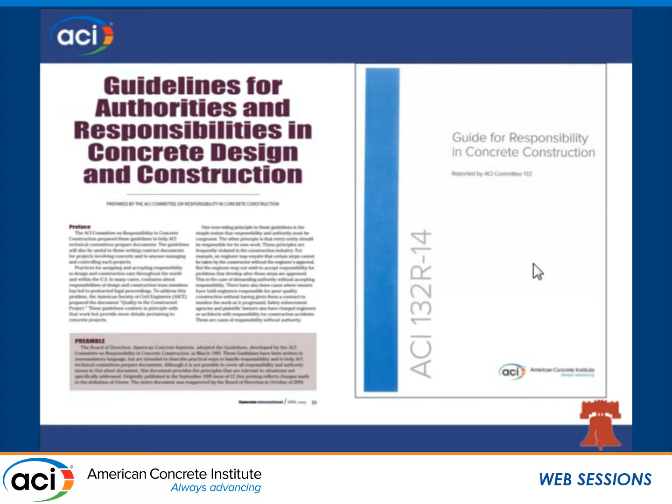They were not a board committee for long, or I guess it wasn't a long-lived situation as a board committee. They then became a technical committee because they had an important message to get out there. So they ultimately did publish a formal guide document on the responsibilities in concrete construction. A very important document, but it addresses the responsibilities in new concrete construction, which are significantly different. So one of the things the committee is looking at doing now is to either create an additional guide or an appendix to really address the differences in the repair rehabilitation industry.

A little bit more background, I'm going to reference a very important document through good portions of the presentation this morning: ACI 562, the code requirements for assessment, repair, and rehabilitation of existing concrete structures. This is a new repair code that's in the process of being adopted officially throughout the country.

Hopefully everybody in the room is familiar with this, but the intent of this code is, you're all familiar with 318: once a building is built and has a certificate of occupancy, the expectation is 318 is no longer applicable to that building. 562 comes into play, so any alterations, repairs, or renovations that happen to that building really get governed by 562 in the future. And as with 318, 301 is the specification that goes along with it.

There's a document that hopefully will be published within the next year: 563, which is the specification, the instructions to the contractor for repair.

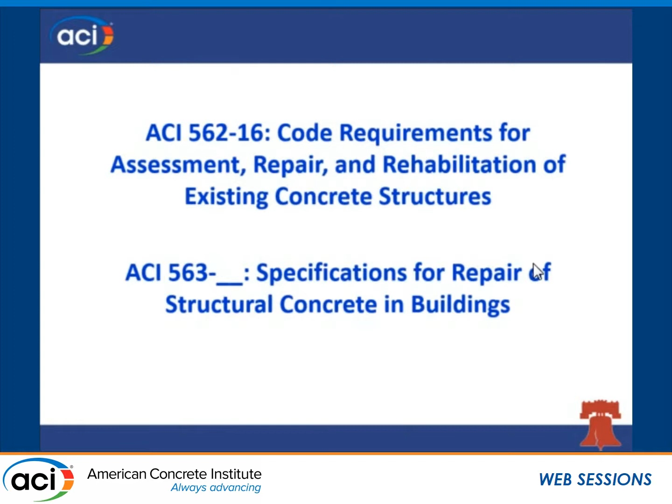So we'll talk about the first facet of any repair project. They always begin with an evaluation, and evaluations are done for a number of reasons. Whether an owner wants to change the use of the building, there's deterioration or distress in the building structure, there's damage that happens whether it's by fire or a natural event like a hurricane or storm, or even just a transaction — an owner selling the building and a new owner taking it on.

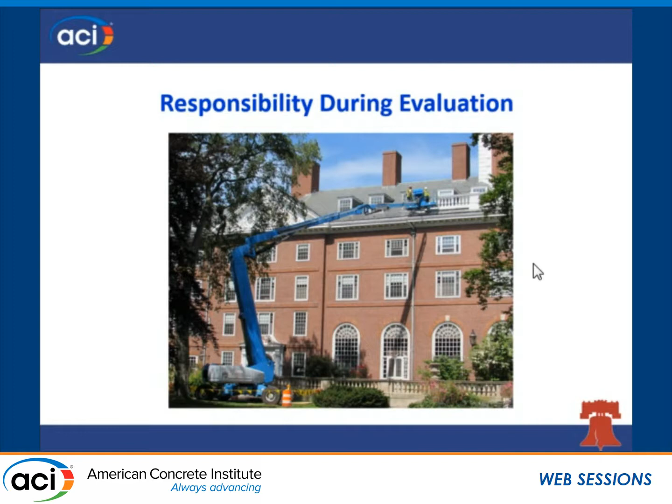So there's a lot of reasons to perform evaluations. Just so you know, I know Keith's not here, but I tend to use the terms evaluation and assessment interchangeably. I know they're not the same — they changed the title of the code from evaluation to assessment — but I'll use them interchangeably, so pardon my taking that liberty.

There are a number of guidelines out there that help understand and are very useful when performing evaluations of buildings. ACI 364 has a guide document, Evaluation of Concrete Structures Before Rehabilitation. ASCE has 2 relevant documents, and these are just a couple that are listed. The ASTM one talks about doing due diligence level assessments. The Japan Concrete Institute has a recently published document that's very extensive — it's a very good document. And then the last one on the list there is the one everybody's familiar with now: facade inspection ordinances.

And there are other documents out there. The thing about these documents is they're very good at talking about the process for performing evaluations.

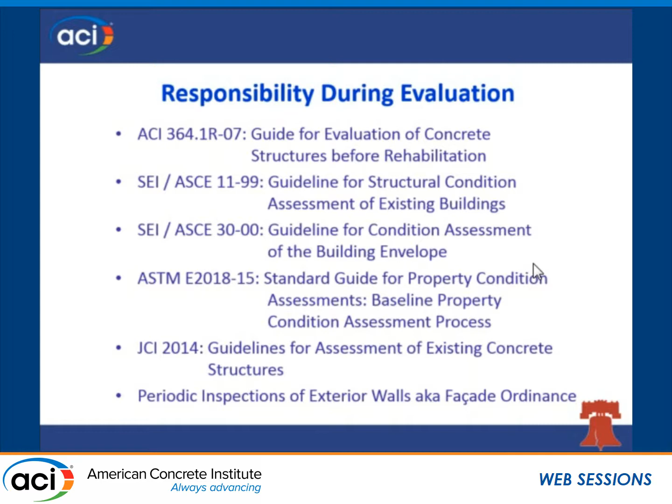They talk about different levels of evaluation, whether they're detailed or preliminary, and in some cases due diligence, giving a lot of instruction in that regard. But when it comes down to the standard of care and the responsibility of a design professional performing that work, there's a lot to be desired, certainly room for improvement. Let me give you some examples of how they do address that. The Japan Concrete Institute defines what they call a responsible engineer, really talking about the qualifications of the person performing that evaluation.

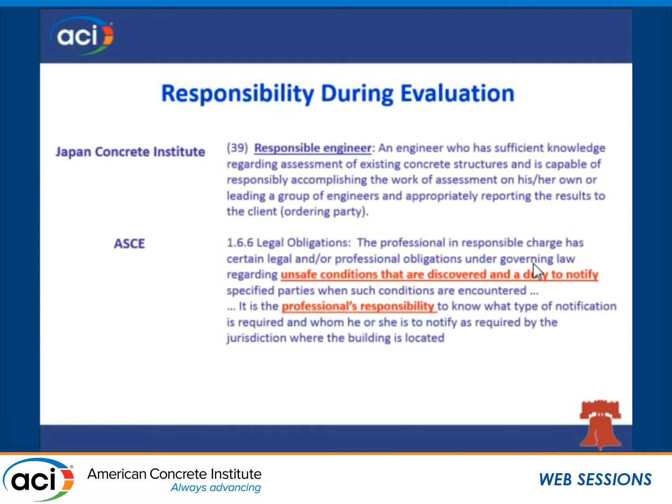Where these guides get far more specific about responsibilities is typically when you're dealing with unsafe conditions. This is an excerpt from one of the ASCE guides, and I've highlighted that area in red. Whenever unsafe conditions are discovered, you have a professional responsibility to do something about it, typically to notify the proper party and then see that it's remediated or to protect the public.

Facade ordinances have been around in some jurisdictions for quite some time, but in Philadelphia they only adopted theirs probably about 6 or 8 years ago. This is an excerpt from their ordinance, and again I've highlighted some of these areas. They talk about an appropriate professional standard of care to detect distress conditions.

When you undertake a facade ordinance inspection, you're specifically looking for conditions that could be a hazard, and if you discover it, you've got an obligation to report that. In Philadelphia, there's an obligation within 12 hours of encountering that condition. These guidelines are beginning to get far more definitive on responsibility. Going back to what 132 is trying to do is fill in the gaps and provide more information—that's what we're hoping comes out of presentations like this and the special publication.

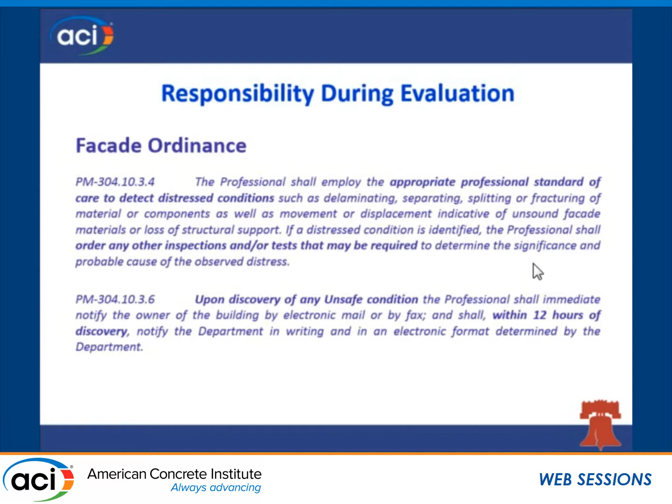Now let's give you some specific examples of responsibility during the evaluation period—some things that were considered that seem to make a lot of sense, and some things that perhaps weren't considered too well. This is an overview on the left-hand side of an aging parking structure in the northeastern United States, serving a healthcare facility. I think this is 30, 40 years old—it was an unbonded post-tension system, still is, it's still there.

The photo on the right, I apologize, is a copy of a photograph so it didn't come out too well. But what was very apparent—back up a little more—they had a condition assessment done by an engineer that told them they had problems, that the post-tensioning system was failing. That evaluation was several months old. When I was asked to look at it, they were getting proposals from several engineering firms.

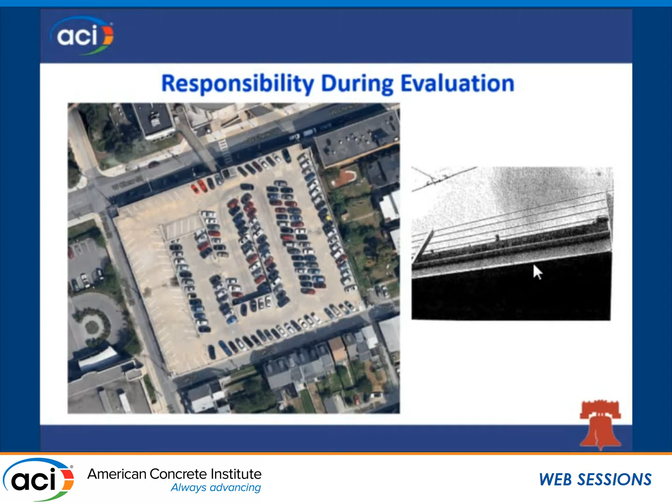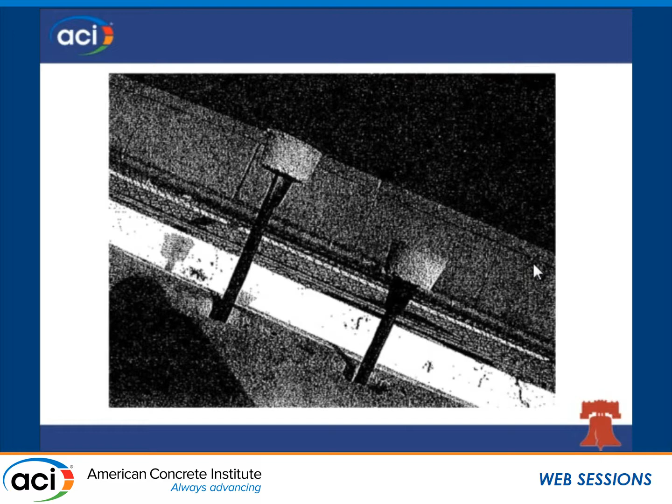They had given recommendations to not park in certain areas of the deck—good thing. I was kind of surprised it had been several months since this report and they hadn't done more. But probably the thing that was more disconcerting to me was there were probably 24 tendon anchors sticking out of the perimeter of the garage as you walked around it. So it wasn't just a couple of tendons—obviously there's a concern.

You want to tell the owner of the parking structure that there's probably an impact on the load carrying capacity of the garage with this amount of tendon anchors. The thing that's not really apparent though is that right across the street is residential homes—this building was surrounded on 3 sides by row homes like that. I don't know if you've ever seen anchors, whether cut accidentally or broken accidentally, but there's a lot of energy released when an anchor goes.

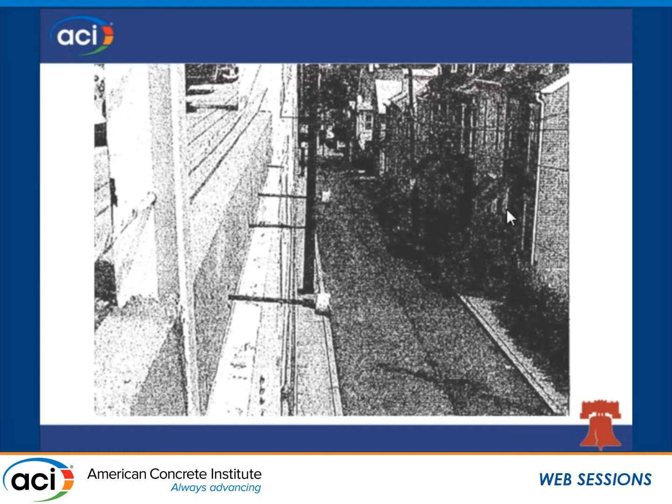You see some of these are still intact right here—they don't all have grout pockets on them. It's not uncommon when anchors break that the grout pocket is shot across the street. So again, we talk a little bit about standard of care and how you really have to have a far better sense. When looking at distressed structures, you really should have a pretty good understanding of what type of structure you're dealing with and consider these things.

If you were here in the morning session, you saw a different vantage point on this photo. You just see things in structures sometimes - I've seen enough of them, I laugh a little bit. That shim stack was in there when they built this garage, which was 15 years old at least when we walked through it.

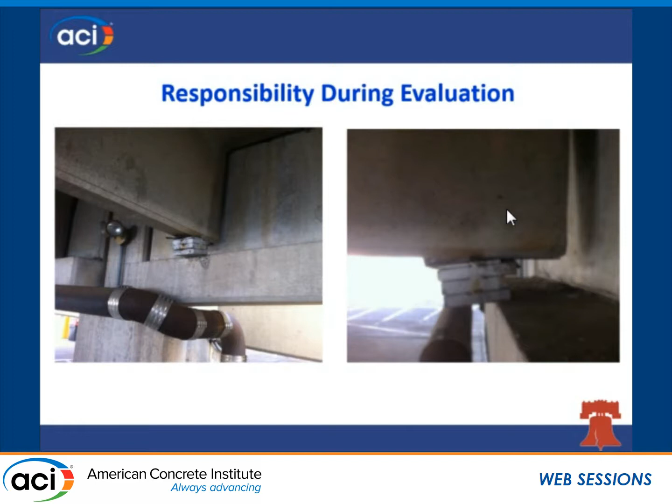If you know anything about precast pre-stressed structures and T's, they tend to move up and down, and the bearings move over time - there's a certain amount of movement that happens. So in the right-hand shot, looking at that closely, that shim stack's about ready to fall out. If you were here in the morning, you saw a picture Keith Kesner had where we actually jacked that back up slightly, pushed the shim stack back in, and stabilized it so it wouldn't come out again. But facade ordinance inspections - I mentioned this for a couple of points I want to make in this case.

When an engineer undertakes an ordinance inspection of a building, they really should be prepared to not only discover unsafe conditions, but to potentially be in a position to do something about them. We were asked to look at this building - it was very apparent this is a limestone clad building, but concrete precast clad buildings could have the same types of problems where you see that halo on the right-hand side. They're obviously distress from the anchors that were causing these fragments to pop off.

This is a relatively new building. When an engineer gets into a situation like this, our policy is not to just tell them they have a problem and go to the local authority and report the unsafe condition. Typically what we'll do, before we even get into a project like this, say when we're proposing on it, is include some level of access to get up close and look at it, to investigate it sufficiently - whether that's renting a high reach or putting a swing stage on a building.

We're usually engaging a contractor. In a situation like this, we actually have a contractor on board with us that helps us facilitate and do the inspection. And then we tell the owner at that point in time, here's some idea on how you can remediate this condition, and we're ready to remediate it as step 2.

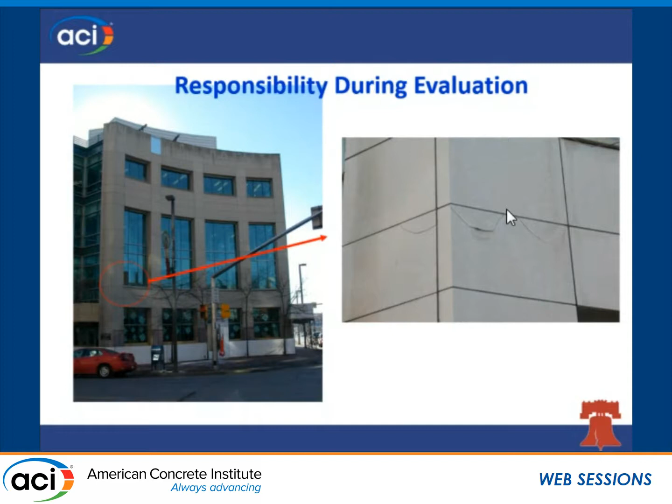I put this up here, due diligence assessments. We don't do a lot of due diligence assessments, but there can be some real significant concerns when you're in that situation. Number one, if you discover an unsafe condition while you're doing a due diligence assessment. By due diligence, I mean, say during a transaction, you're working for a potential buyer of a building.

You see a condition in the building that really is unsafe. You're not working for the owner. Who do you report that condition to? What authority do you have to report that condition to a local authority? What you report on that probably will have an impact on that transaction. So I don't know if you do due diligence assessments, but if you do, you just have to consider a lot of the things that you may run across.

Right, so now we'll transition a little bit and talk about going from evaluation into repair design. This is a clause out of the 562 code that I think is relevant for what I'm going to show you next. And again, the emphasis is added here.

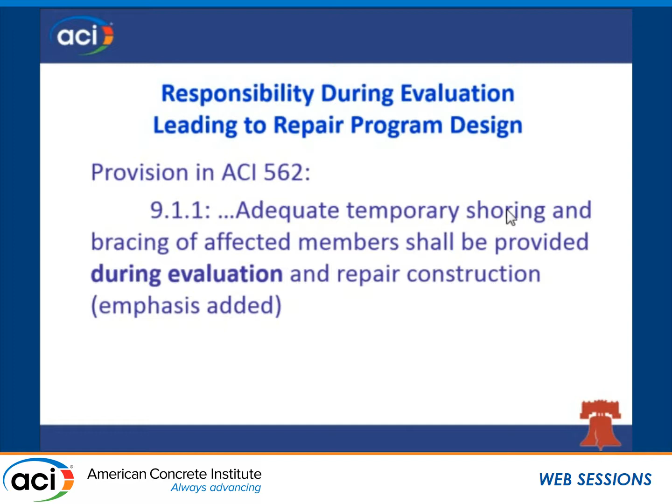So the adequate temporary shoring and bracing of affected members shall be provided during evaluation and repair construction. It's not uncommon that you see conditions during an evaluation that probably shouldn't be left in that state while you put the repair design together and go out there and repair. Sometimes you have to just jump on it pretty quickly. So let me show you an example of a parking structure that we were asked to look at.

It's 3 stories below grade underneath of a research science building. I'm not sure if this is real clear, but as we're walking into the garage and looking up, for the structural engineers in the audience, you'll see some shear cracking. That's not flexural cracking, these are joists. There's no shear reinforcing in these joists. It's more than a few of them that were cracked like that. Became very concerning and something that we brought to their attention right away.

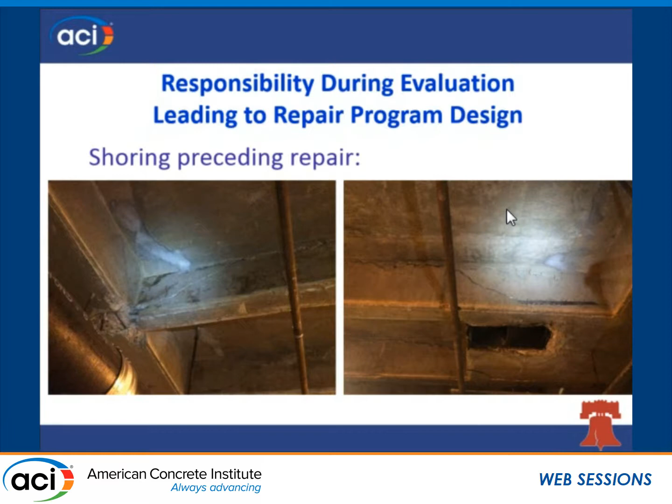But then as we look further, what you were looking up at was actually the loading dock, it wasn't even the garage. Here's the doorway and the ramp into the garage. So to get in the garage, you went in and out here. Those joists you were looking at were underneath there.

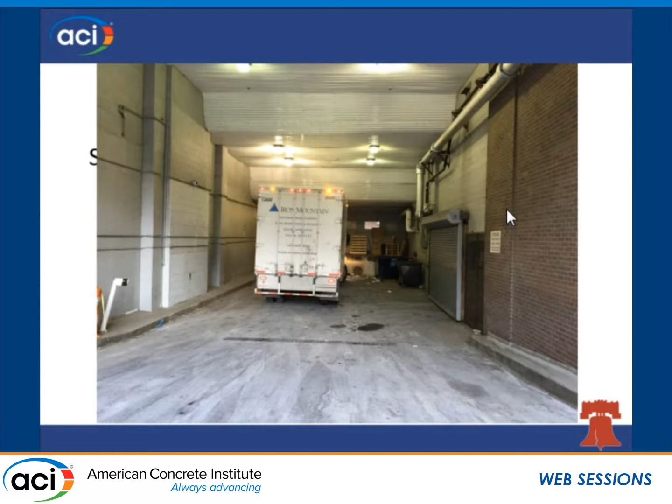So needless to say, we didn't think that was something that could sit that way for too long. So we spoke to the owner about it. They basically stopped using the loading dock actively to bring trucks in. And within a couple of weeks, we had put together basically a shoring program to go in and shore the affected areas, but yet keep the rest of the garage operational down below.

Again, designing new buildings, not a lot of situations where the engineer of record gets involved in shoring. If they do, they delegate it. This needed to happen rather quickly, so we're not too timid about those sorts of things. So we designed a shoring system. We were very specific about what we wanted and how we wanted it installed. And so we prepared documents for it, got proposals, and went out and put it in.

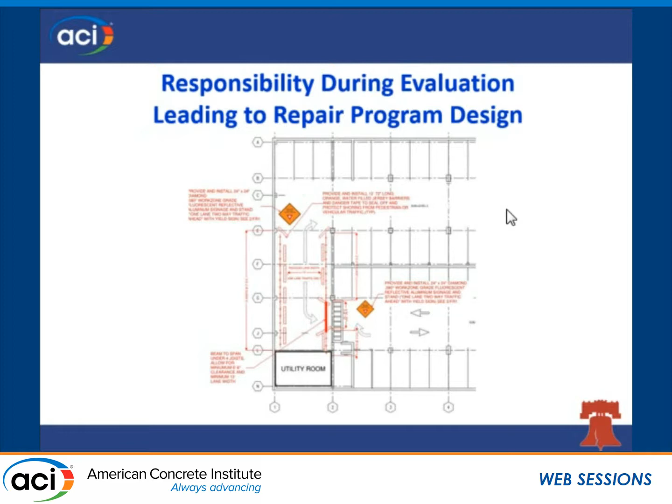So we shored the joists. This is the lower level ramp that you could get under so the garage could stay operational. And really within just a couple of weeks, they had the situation back, at least it was safe. It was quite some time afterward that they went and funded the garage repair they were going to do on the building, but at least it was safe.

All right, now into the repair design itself. The design of concrete repairs, there's a lot that goes into that. You've all attended sessions, presumably, on corrosion and assessing a building and understanding the cause of deterioration and distress in it. So there's a lot that goes into that part of it.

But there's an awful lot that goes into the design of how are you going to accomplish the work. How are you going to access the areas of the building? It's the false work, the scaffolding. Are you going to constrain the contractor or provide limitations for that? This is a stadium that many of you may be familiar with, doing a quite large concrete restoration program on it. And the first phase of it was scheduled to last an entire year.

And the idea, or the two things we looked at is, do we scaffold off the lower grandstand up to the underside of that? If we had scaffolded off these grandstands up, what happened was it would just preclude the use of the grandstands for that entire period of time. This is the Ivy League, they don't fill this stadium for football, but they do fill it for graduation and for certain other programs throughout the year, so that was important.

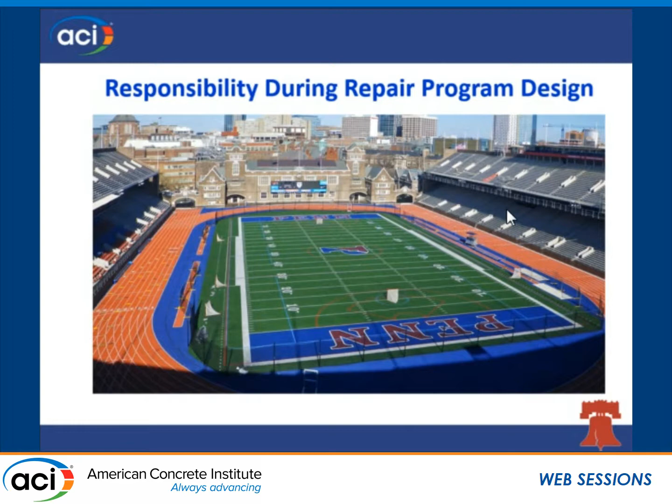So the challenge for us was to look at how do we scaffold it so that they can accomplish the work, but still have the stadium mostly accessible during the year. So we had looked at different scaffolding alternatives for that.

Again, I mentioned means, methods, and sequences of construction. The design professionals in the room are very familiar with that term. Every agency agreement for design professional services, AIA, EJCDC, specifically states that the design professional is not responsible for means and methods and sequence of construction. And we know why - it directly connects you to safety obligations. However, you really can't do effective repair projects without getting well down that path into it.

And this is what 562 talks about. The design professional is responsible for the structural stability, the overall stability of the structure and all those members during the repair program. So the design professional has to consider how that structure is going to react during the repair program.

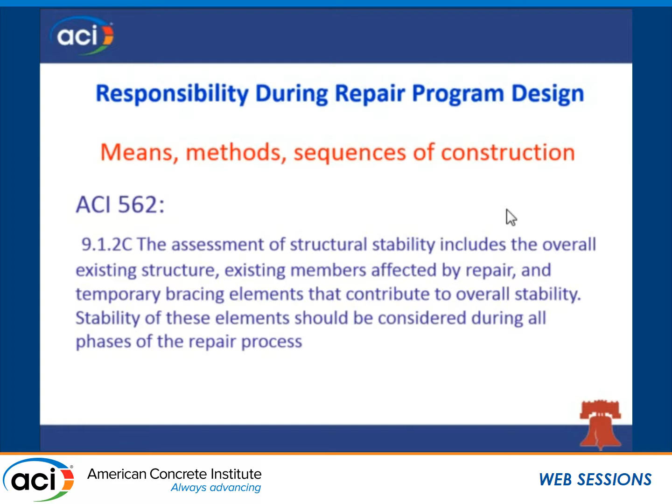In our case, we were talking about how it's going to support a suspended scaffold system that was hung from the upper grandstands to basically facilitate the work. So we did a lot of analysis during the design part of the project. These are the large raker beams that we looked at, and we assessed how they can support the load of the suspended scaffold system, the staging on it, the debris that gets taken out, the material that's put in, the equipment used during that process.

So our obligation as the engineer of record was to make sure the structure could take it, to tell in the delegated design to the scaffold contractor, this is where you can attach, these are the maximum loads you can impose. So this was really the result of their delegated design.

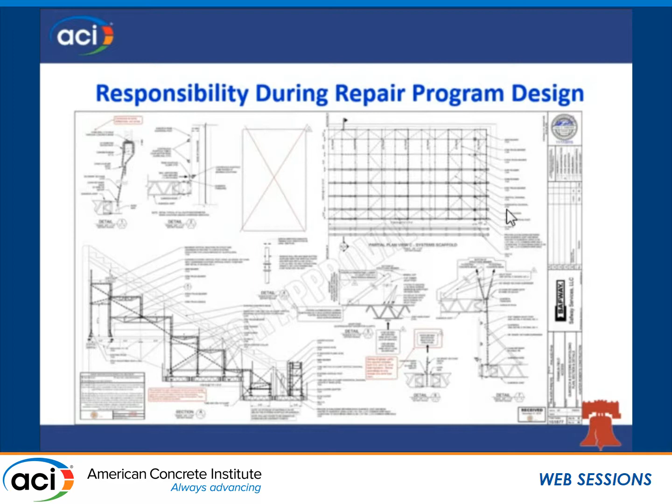And we suspended it across most of it. At the end, we did have to erect some areas where the scaffold was built off the lower grandstand levels. But you'll see everything that has to get considered - the scaffolding in a stadium has to consider more than just the equipment and the personnel. It's got to consider wind loads, because we've got the thing completely enshrouded to confine dust and debris and everything else. Again, in new construction, engineer of record only goes so far in looking at scaffold systems like this.

We designed an awful lot of this, and this was actually bid straight to a scaffold contractor, and they were brought on directly by the owner. They really had no relationship with the concrete repair contractor at the end of the day.

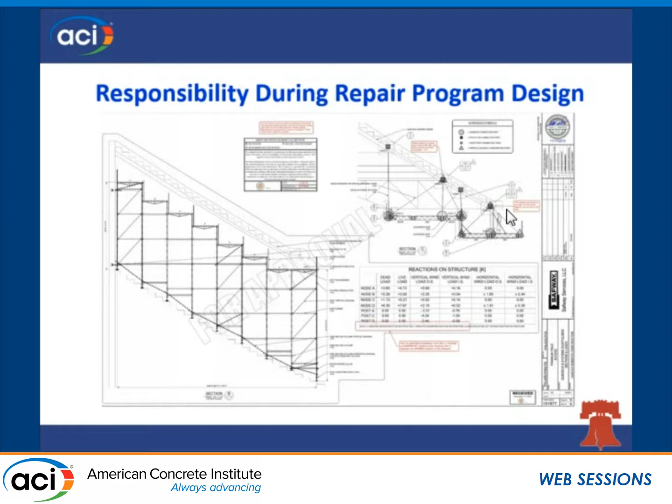Parking garages is something that we like to do. Just about every owner you run across, when they do get into a repair program, the last thing they want to do is close the garage. It's a revenue-producing facility for them. So the challenge is really, how can you effectively get the work done by minimizing the amount of spaces that are lost in the garage?

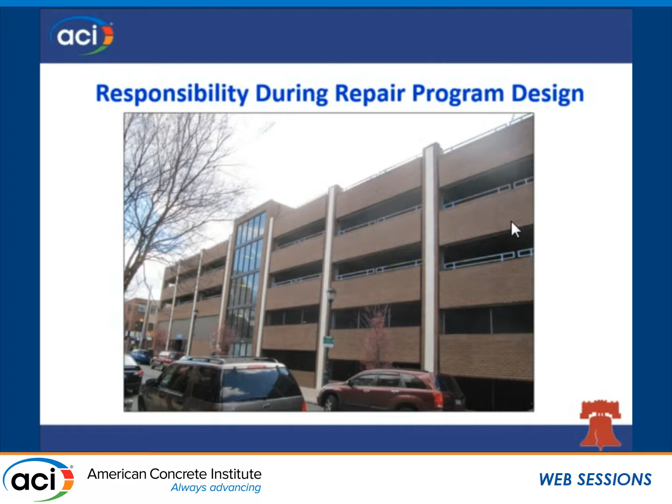So you're into the sequences automatically. You're looking at how do you concentrate work areas to maximize the productivity of the contractor, while at the same time allowing vehicles to drive in and around that area, allowing people to safely park in the facility. So you get into the parking logistics of it. But then there's another significant part that you always inevitably get into.

So we look at another clause in 562. The design of shoring and bracing members, in the assessment, has to be based on the existing cross sections present in the structure that you're dealing with.

When you're working on a parking garage, in this case, we work typically a floor at a time, so we can minimize the amount of parking that's taken out of service. So we'll close off an area below to make it safe. We have an area that we're working on, but inevitably you're carrying on operations and potentially shoring on parts of the structure that have not been fixed yet.

So you've got to go through and carefully look at the distress and deterioration that exists, rationally make some determination of what's the capacity of that, particularly if you're going to put shoring on it. In this case, it was an unbonded, post-tensioned facility. The challenge of putting shoring in it would have really impacted the parking tremendously.

And there were a number of failed tendons in it.

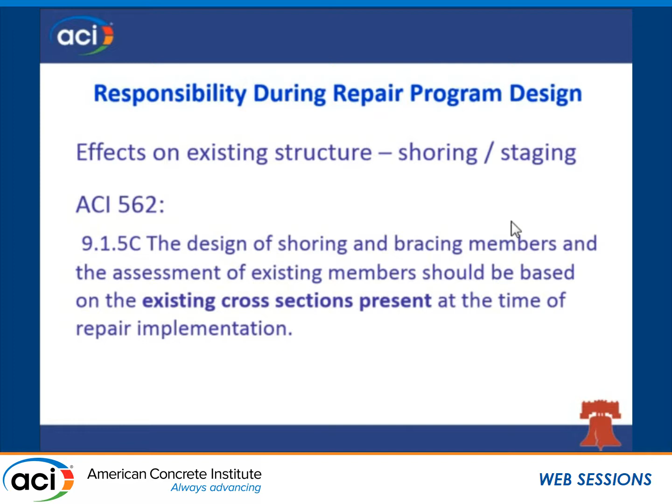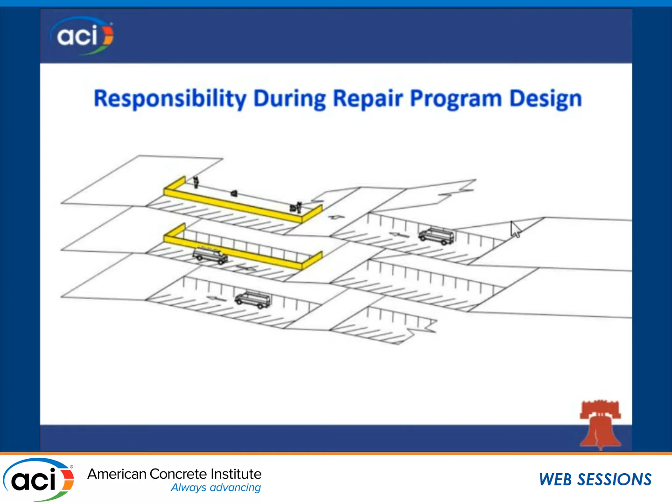We've got it barricaded around to protect the workers and keep people segregated. We've protected the area below, taken these parking spots out of service, and we're redirecting traffic—there's a whole traffic logistical side to it. Just focus on the lower left-hand side of this.

So that varied from floor to floor. One challenge was how to—let me back up a little bit. Our attitude was we didn't want to give the contractor the latitude to figure out how many tendons they could cut at any given time for the garage to remain safe for them to work on.

So we actually told them: you can only take so many tendons out at a time, splice them, re-stress them, and put the strength back into the deck before you move on to the next level.

So even though we would close half the deck, one way to do it, the contractor might whack all the tendons at once. We didn't give them that latitude. We said you can take so many out at a time—we felt the deck was still safe at that point in time.

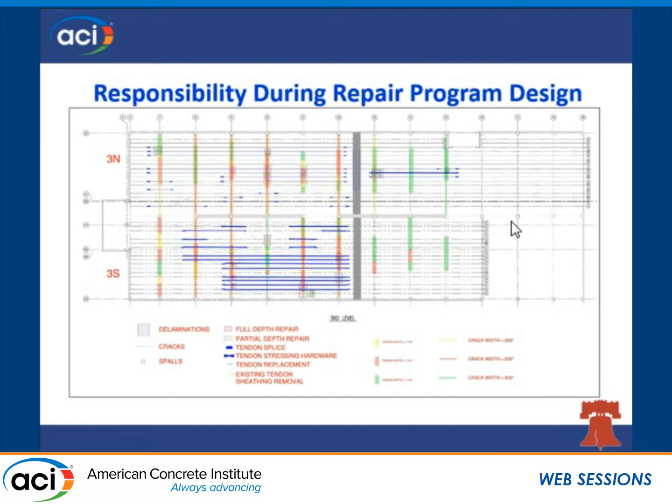Again, we're constraining the contractor in that regard this far into the sequence of things, but we just find that's the way to successfully do it. If we had given that to the contractor—not that they're not smart, not that they can't figure those things out—but we just feel that's too much to delegate to them. You lose too much control.

All right, so we move on to the construction side of things, where it really gets to be a lot more fun. Quick example for you: this is a rather unique case because there were four engineering firms involved in this program.

Not the original engineer, but the engineer who had done a lot of work in the building and was familiar with it. They looked at it and said, we need to shore this thing, then figure out how to reinforce it. So the engineer of record sought out a shoring contractor to put shoring in place and then figure out how to reinforce it.

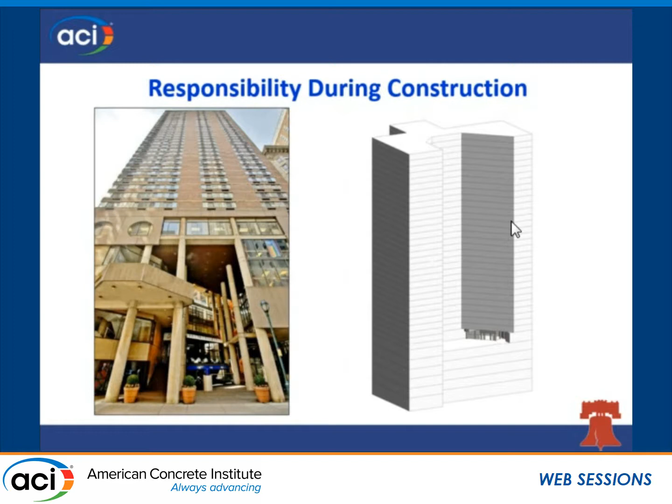In this case, the engineer for the building wanted to jack it back up. Lots of challenges—so just trying to illustrate for you what was happening.

This is a cutaway of the inside. So you have the 37th floor up here, and this is the 6th floor where the transfer girder happened. Ultimately, we figured out that this girder failed.

It was severely under-reinforced, and it failed as they were building the building. Somewhere around the 8th or 10th floor, it had gotten enough load on it that it failed—it didn't just happen. The engineer for the building had done that analysis and gotten satisfied at that level. I'd say the real challenge for us was that they said, we want to push that girder back up. So how far are you going to push it back up?

What's the force you're pushing back up? What's going to happen when you push up here? What happens in all these adjacent bays over there?

We had a lot of conversation. Our role in it, we were actually brought in by the shoring contractor. Our role was to figure out how to shore it and jack it back up. They had another engineer who was going to design and be responsible for, ultimately they put an external post-tensioning system on it. So that was the third engineer. And rightly so, they went out and got a peer review engineer to look at the thing and say, are we all crazy for what we're going to try and do here?

Challenging project. It actually worked very well because the lines of communication, because you had engineers that were very respectful of each other, that were experienced, and we had a lot of open dialogue back and forth in communicating what were the challenges. You can see if anybody's ever tried to do something like that before. You don't run across these too often.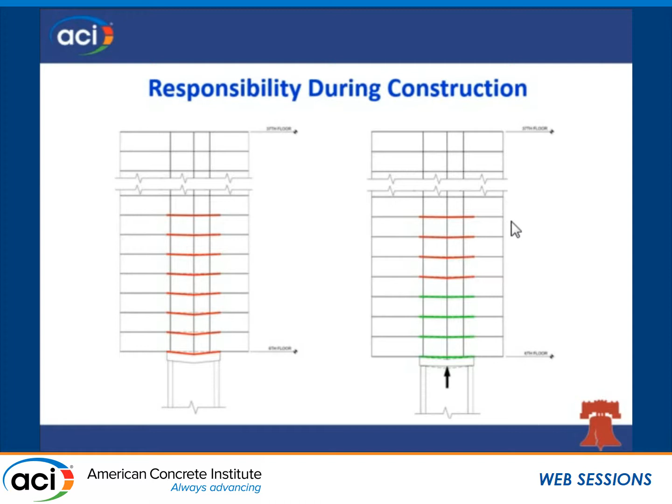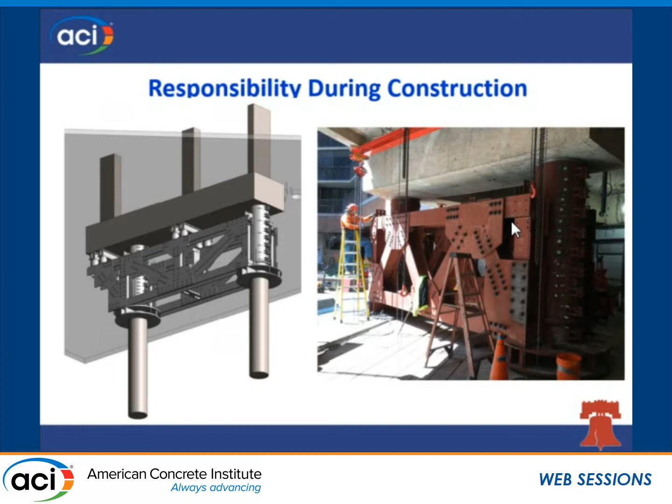No small undertaking. To give you a sense of the scale of that, this is the truss we put into place. There were 3 of these. This is false work. This is a complete open drop 4 stories down below that. So they rigged all that stuff, and that's the truss that we put in place and jacked up off of. It's fun. You don't run across those too often.

So back in the real world of how we commonly run across jacking things, anybody's work on precast, pre-stressed garages, it's not uncommon. The garage has been there for a while. There's problems with the bearing pads, so you've got to jack them up and get the bearing pads out.

We personally don't think it's wise to let the contractor figure out how to jack and undertake that operation. There's a lot of connections, the camber clip connections here. There's connections that hold the T's to the ends of the spandrel beams. We just don't think it's too wise to give them the latitude to figure out how to jack it up. So in this case, what we do is we typically always will jack up these 2 stems, causes the least amount of distress to the camber clips.

This garage was unique. This garage was probably 35, 40 years old. Most of these connections were already broken. The garage was very happy and free and moving around a lot. So we weren't too worried about these. But we gave them this sequence. We said, in no uncertain terms, this is how you will jack it up, this is how you will replace the pads.

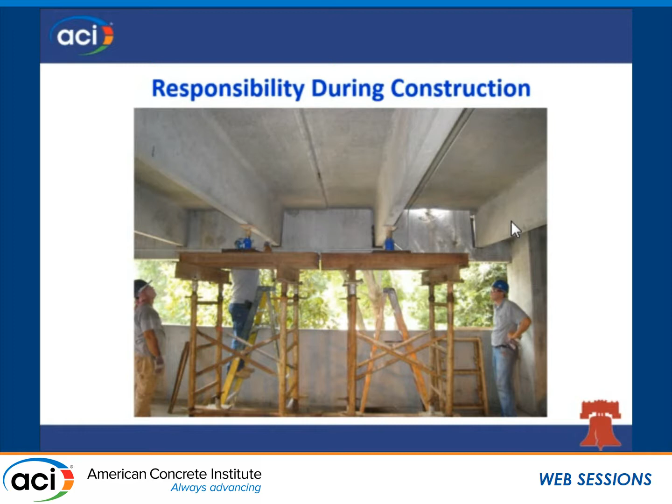And there's things you just have to anticipate. Maybe like a lot of garages, the T-stems line up from floor to floor. It didn't in one case, so you can't take for granted. We tried to bring the load down on the T-stem below. It's not easy to analyze what's the capacity of the T-stem below, but you can make some rationale on that. But in this case, it didn't, so we actually had to put extra shores in there. It's a good thing somebody looked.

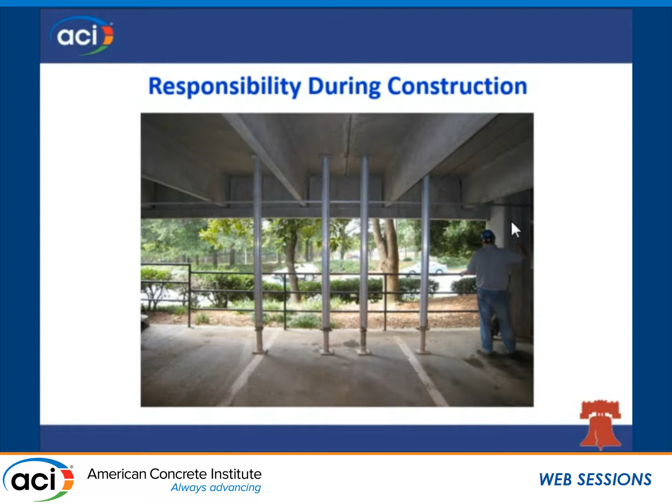We had anticipated shoring it to take that all out. We thought we had everything anticipated pretty well, but you still scratch your head at the end. We took so much concrete out here. At the end, we're looking at this and wondering, that's a 2-story column in the bottom of a 12-story building now, and we're doing some serious stuff to its unbraced length. So things just come along that you don't necessarily think about all the time.

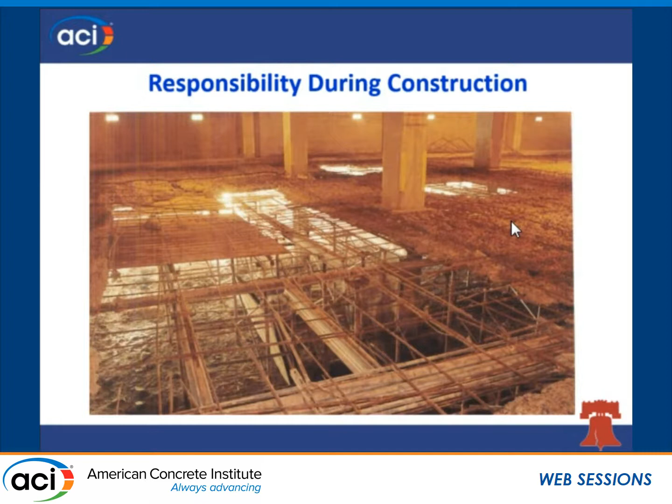So that concludes my presentation. Hopefully you've gotten a little bit better sense of some of the things on how those lines are crossed. And it's a wonderful business. We enjoy what we do on the repair rehabilitation side. There's definitely challenges there, but we find a lot of successes come from not being timid and crossing those lines, and just open communication.